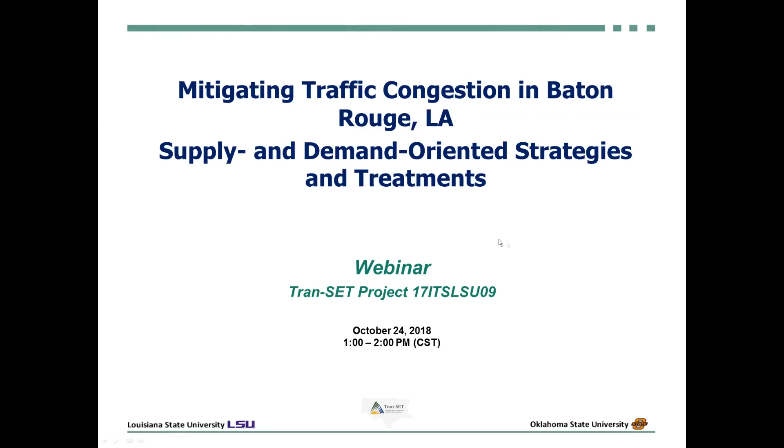The project is entitled Mitigating Traffic Congestion in Baton Rouge: Supply and Demand-Oriented Strategies and Treatments. We'll go over some general background. The purpose of the study is to identify treatments and strategies with emphasis on the bridge, the I-10 Mississippi River Bridge.

The I-10 corridor is one of the heavily traveled coast-to-coast interstates. It carries a large number of trucks and has been identified as a freight corridor. The portion of I-10 that goes through Baton Rouge was constructed in the 1960s. It's a 4-lane freeway, meaning 2 lanes per direction, and the Mississippi River Bridge on I-10 is also 2 lanes per direction.

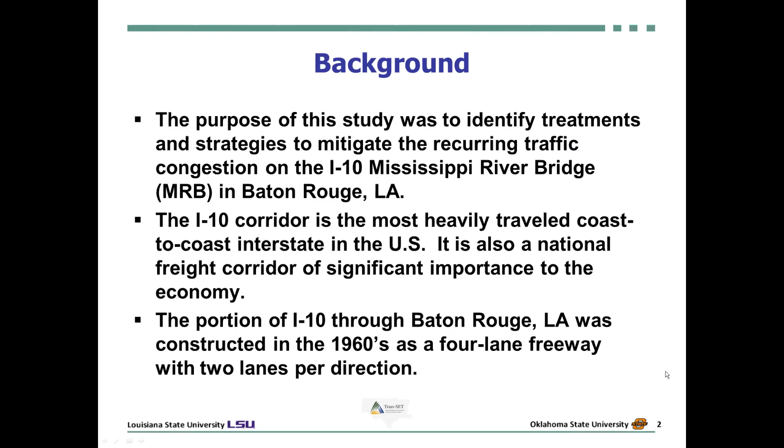There are traffic lights along that corridor. They are not synchronized and wait times are very long. Most people traveling from east to west or west to east relative to the river prefer to use the I-10 bridge because it provides a direct connection to most significant points of interest. Also, the older bridge and route leading to it are not in good shape, which is why the older bridge is underutilized.

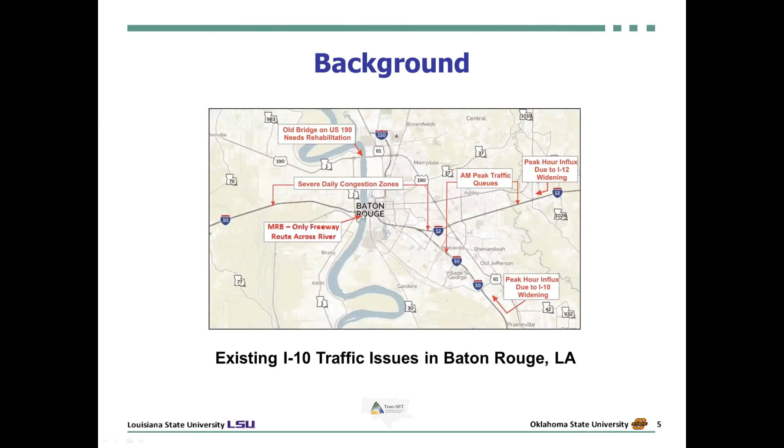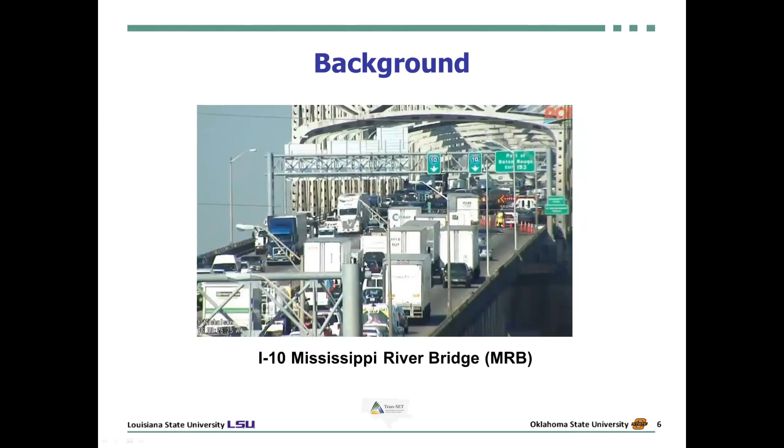So these are the problems that we have now. From this point on I-10, more or less to the junction between I-10 and I-12, we have recurring congestion during the morning and afternoon peaks. The project was to address that congestion with emphasis on the bridge, to see what can be done. This is a picture of the bridge—as you can tell, a large number of trucks traveling in stop-and-go conditions.

Relieving congestion on the I-10 Mississippi River Bridge can be done easily if we have money to construct a new bridge. But a new bridge will cost about $1 billion, and that's in dollars from maybe 10 years ago.

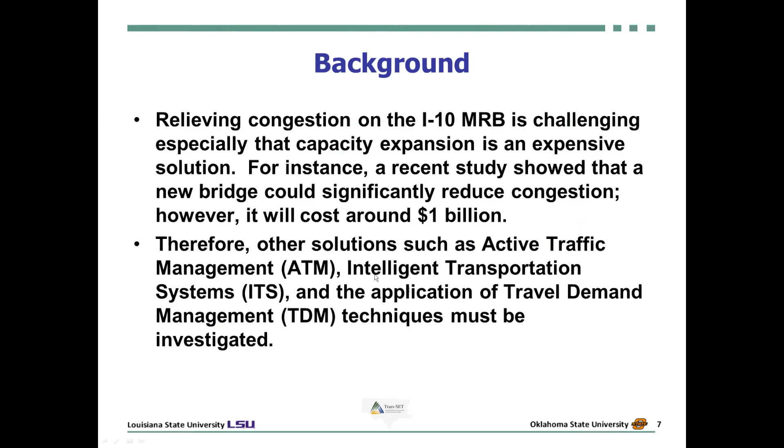So that option really is not feasible economically. We were asked to look at other solutions that have not been explored in depth, especially active traffic management, intelligent transportation systems, and travel demand management techniques. That's the focus of our work, these applications.

Just to give you an idea about previous work done to address congestion on I-10 and the Mississippi River Bridge, there were studies and projects proposed for the I-10 corridor itself, and projects proposed off the corridor, the roadway network beyond the corridor.

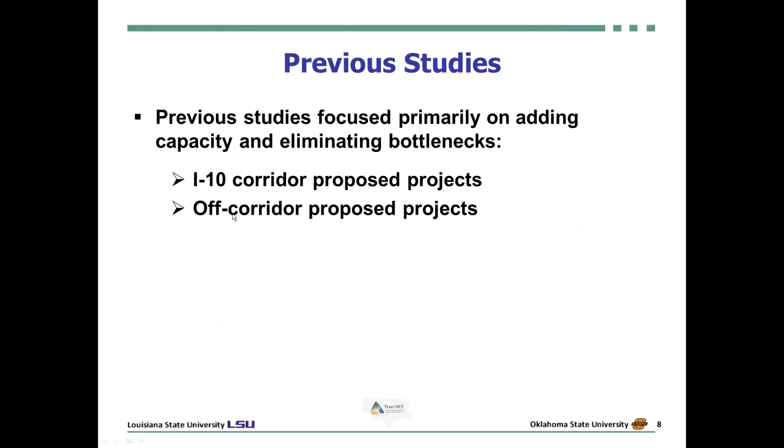Examples of I-10 corridor projects include the I-10 Baton Rouge Major Investment Study, sponsored by Louisiana DOTD in 2000. There is also the National I-10 Freight Corridor Study, a national study in which FHWA and LDOTD participated.

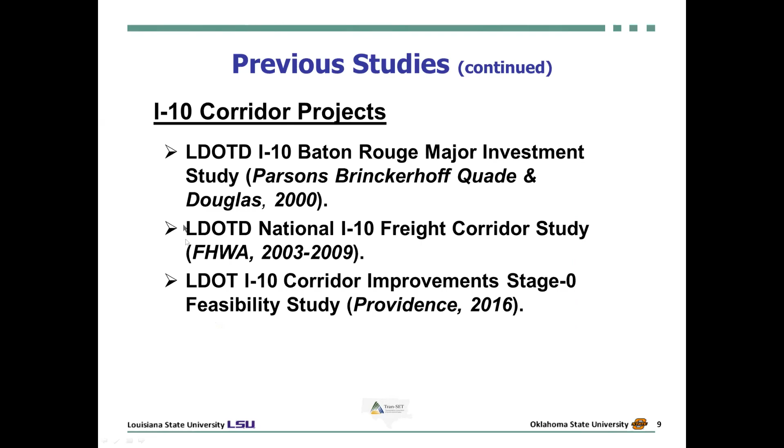There is also the LDOT I-10 Corridor Improvements Stage 0 Feasibility Study, which is more recent. So these are the major studies that address the corridor itself. These are examples of the cover pages of these studies, available on the web.

This is something recent I have seen about capacity improvements to the I-10 corridor, east of the bridge. There are 3 stages proposed, primarily widening the I-10 from 4 lanes to 6 lanes, adding 1 lane per direction, and eliminating some on-ramps and off-ramps, rebuilding them as new ramps to eliminate weaving and excessive lane changing. These improvements are along a 3.5-mile segment of the I-10 corridor, with an expected cost of $350 million.

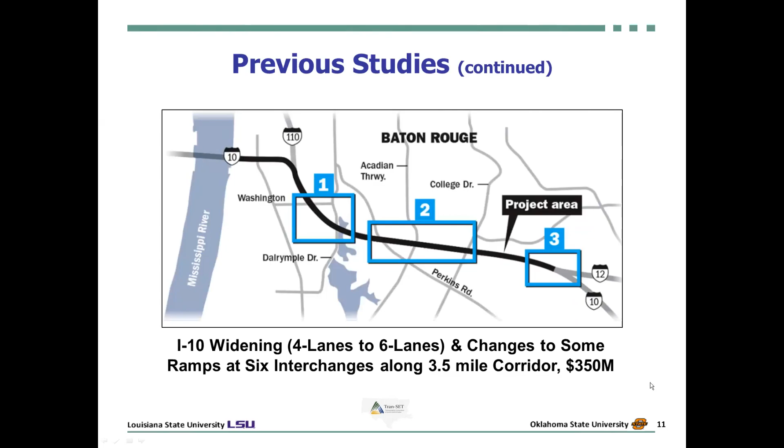This here is stage 1. It addresses the exits at Washington Street and Dalrymple Drive. Some exits and on-ramps will be removed and new ones constructed, in addition to the widening of I-10.

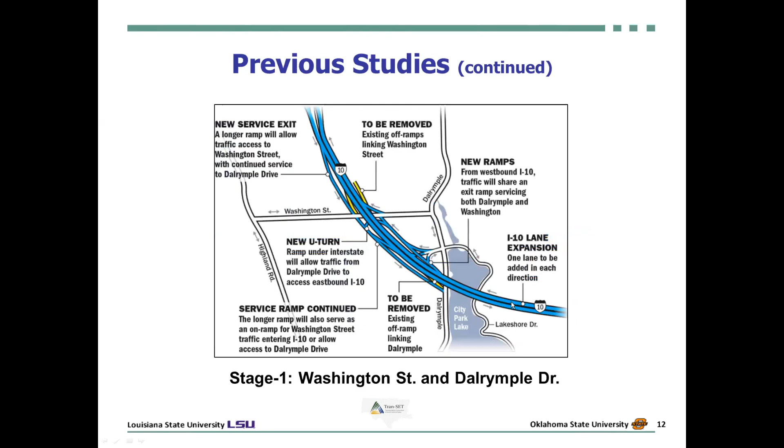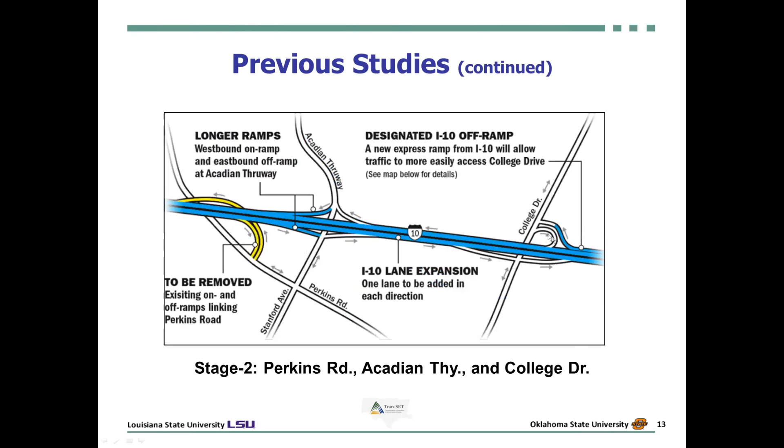This is the second stage, where exits will be removed and new ones modified. And this is the third phase of that proposed capacity improvement.

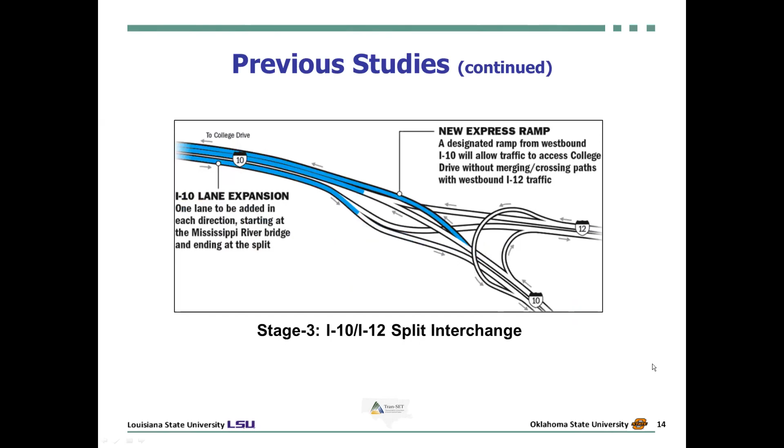Now, off-corridor projects, there were a number of them. One is adding or constructing a new bridge south of the I-10 bridge, but as I said, that proved to be expensive and not feasible.

There is the Baton Rouge Urban Renewal and Mobility Plan, known as the BUMP study, proposed by AECOM. It's a very interesting study, and we'll talk about it in some detail shortly. There is also the West Side Expressway, the Louisiana 1 to Louisiana 415 connector, and the Baton Rouge Loop Northern Bypass. A number of proposals, but unfortunately not too much has been done.

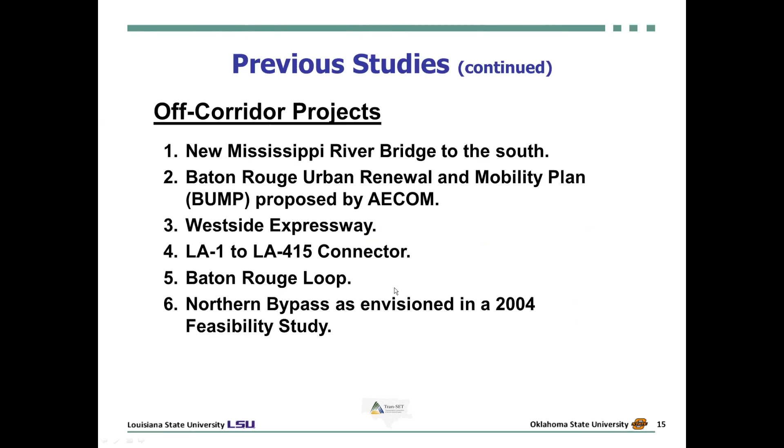The second option, the BUMP study or proposal - the goal is to use the old bridge and the underutilized network that leads from the old bridge in order to lessen the demand on I-10 and the I-10 bridge.

This here is the BUMP study. As you can tell, they use the term SIU for Segment of Independent Utility, meaning you can have this part separate or that part separate. This here is linking US 61 to I-10, with improvements to the 61 and 190 corridor, and rehabilitation improvement to the old bridge itself.

The BUMP project we envisioned to be a toll road, but it really doesn't have to be. If funds are available and finances can be secured, then it doesn't have to be a toll facility.

Also, the existing businesses and land uses nearby would be served by local roads parallel to the corridor, like service streets or parallel service roads, to provide the necessary access to this limited access facility, which would be kind of a toll facility.

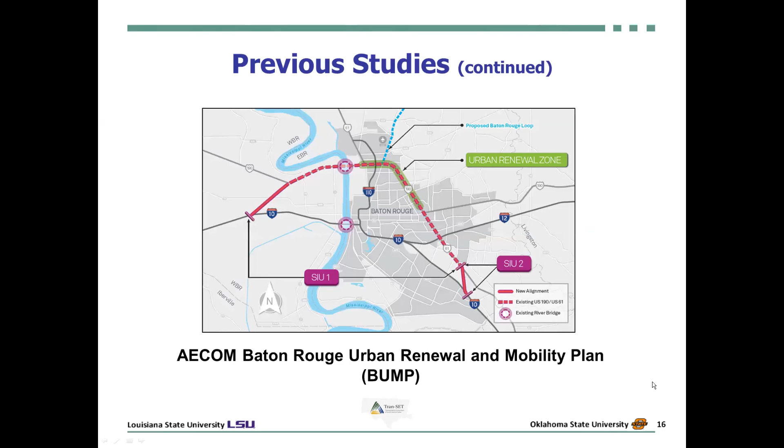The data available to us when we started looking at the problem was not too much, really - that was a major problem coming up with data. Louisiana DOTD was one of the major sources. We had traffic volumes along with a simulation model, the VISSIM model, as we'll discuss.

It was hourly volumes, 3 hours in the AM peak and 4 hours in the PM peak, and these were used as demand inputs in VISSIM.

Streetlytics, which is part of Citilabs, provided traffic volume data: 3 hour AM, 3 hour PM aggregated volumes. These were used in calibrating and validating the simulation model.

Then we have the National Performance Management Research Data Set, a national data set maintained by the FHWA. We used that to come up with travel times and speeds, which again were needed for calibration and

validation of the same model during the AM and PM peaks. Data was also obtained from the City of Baton Rouge and the Louisiana DOT regarding traffic signal schedules and timing, which we used again in the calibration and validation of VISSIM.

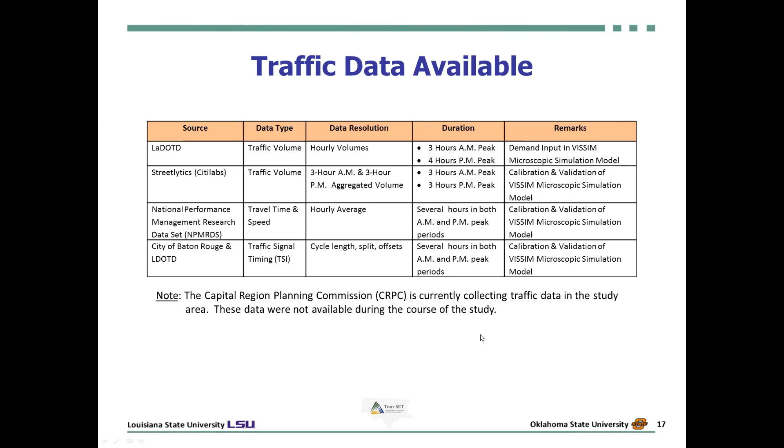Later on, as the project was about to come to an end, we heard that the Capital Region Planning Commission was collecting data that we could have used if it was available to us. But unfortunately that effort is still going on, and we did not have the opportunity to use their data.

As I said, there is a microscopic simulation model, the VISSIM platform. It was available from Louisiana DOTD, and we acquired it. There were some hourly volumes encoded into that model. It was a partial model, not a complete network, just for I-10 and the segments east and west of the bridge. The segments that lead to the old bridge were not part of the model.

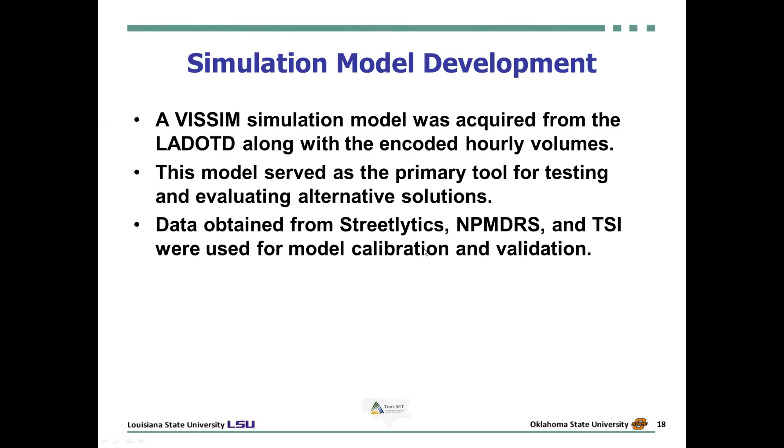The model served as our primary tool for testing and evaluating alternative solutions or recommendations. The data obtained from the other three sources, Streetlytics, the National Performance Management Research Data Set, and the traffic signal data, were used again in the calibration and validation of the model.

The treatments and strategies that we explored were identified by the investigators, the PIs, with some discussions with the stakeholders at Louisiana DOT and the Louisiana Transportation Research Center.

We have the first category of treatments: supply-oriented, meaning adding capacity primarily or eliminating bottlenecks. Then demand-oriented, which has to do with either metering the demand or finding alternate routes to divert some of the demand to an underutilized corridor.

For the supply-oriented measures, one of the alternatives we explored was again to address the junctions, the exit ramps at Washington Street and Dalrymple Drive. The exits there to I-10 were very close, with lots of lane changing and queuing developing and coming back up to I-10 for long distances. So that was one of the proposals that we explored.

The other proposal had to do with improving the corridor on US 190 and US 61 and rehabilitating the old bridge so it can carry heavy trucks. This was also examined in our simulations. For these two, the modes affected are passenger cars, trucks, and transit.

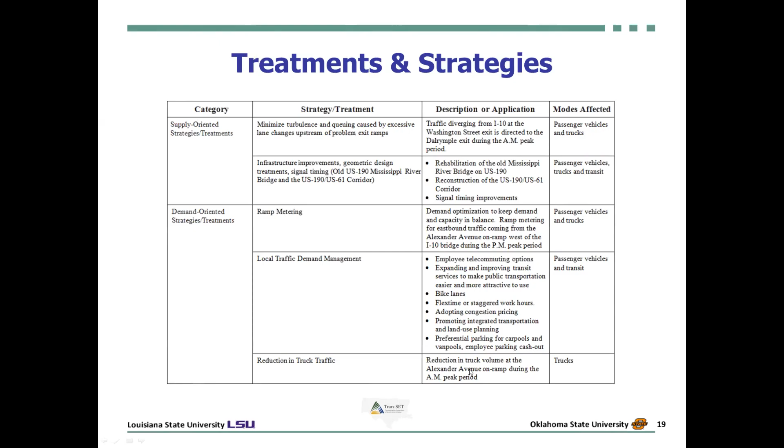The measures of effectiveness and metrics that we used or computed from the simulation model to evaluate the alternatives were: average delay in seconds per vehicle, throughput (vehicle volume), total delay in vehicle hours, vehicle miles of travel, the annual cost of delay in dollars per year, and the economic savings, annual economic savings per year.

Which involves comparing the cost for a given alternative with the cost associated with doing nothing, and that gives us savings. In computing the economic savings, which we call user cost, we took the delay in vehicle hours and multiplied it by half of the average hourly wage in Baton Rouge. The average wage was $21.38.

It's customary when you compute delay, the savings in travel time, to use half of that wage. So half of this times the vehicle hours gives us the user cost. The user cost associated with doing nothing and the user cost associated with any of the proposed alternatives - these two gave us the annual economic savings.

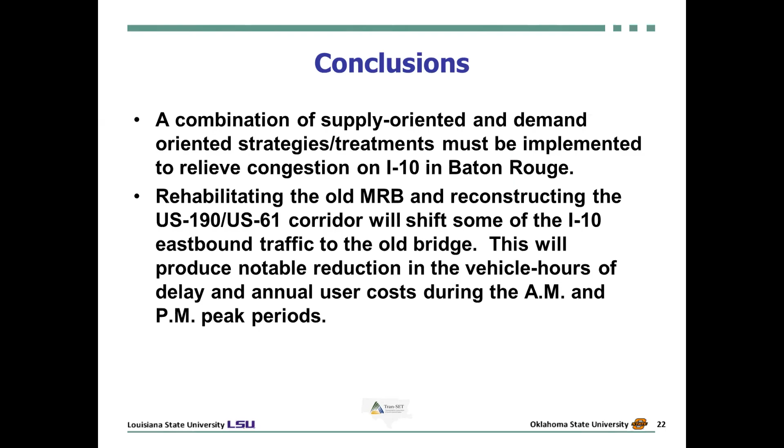Implementation of local traffic demand management, telecommuting, transit, etc., can produce immediate reduction in travel delays or traffic delays on I-10. But as I said, it just requires public acceptance and employer participation.

Ramp metering at the Alexander Avenue ramp - I think there is ramp metering there now. I did not know about it when I wrote the report, but I understood that later. So ramp metering here can again result in notable reduction in delays during the PM peak.

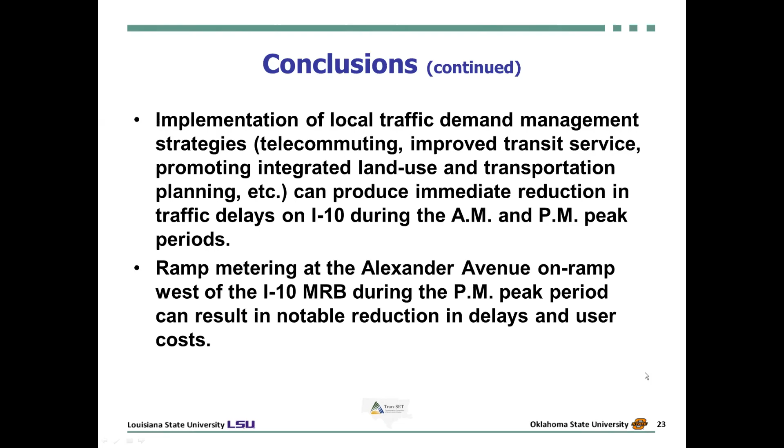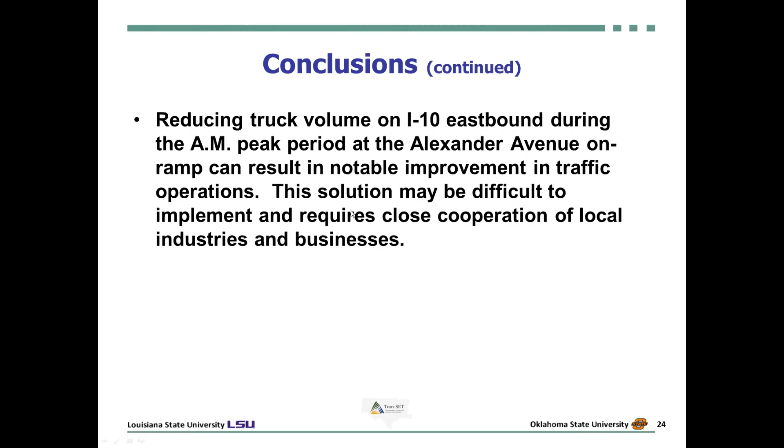Reducing the truck traffic during the AM peak, going from west to east at the Alexander Avenue on-ramp, can produce notable results, but it's just industry acceptance and scheduling the trucks that we have to buy into.

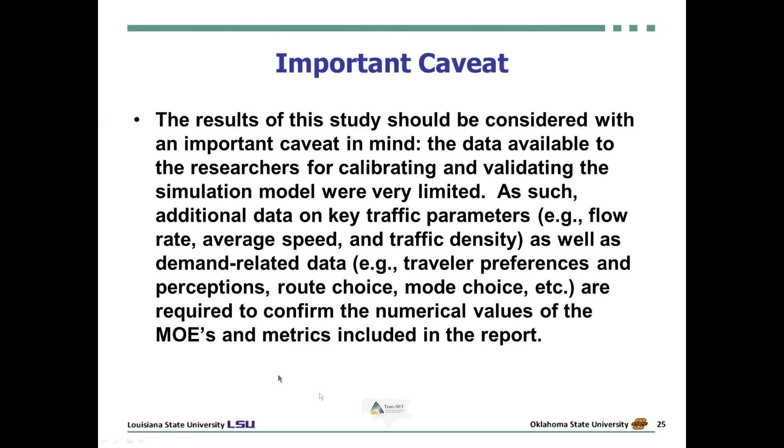There's an important caveat we need to be aware of: the data available to researchers for calibrating and validating the model were very limited. Therefore, additional data need to be collected, and some is being collected now. We need more information on traffic flow rates, average speeds, traffic density, demand or travel demand data, traveler preferences, and perceptions in terms of route choice, mode choice, etc. We need that kind of data to validate the metrics and MOEs included in the report.

I think that's the presentation, and I would like to entertain any questions. There is a question in the Q&A pod, which I'll read.

It's from Hong Wu, a modeler at the Capital Region Planning Commission here in Baton Rouge. He asked what year's NPMRDS data was used in the analysis. The data used here, I think, was 2016, but let me verify that in the report. The reason we didn't use the latest National Performance Management Research Data Set currently available was...

...that we had to be consistent. Some data were obtained from Louisiana DOT, some from Streetlytics, so we had to have a baseline and be consistent with that year, not use data from different time periods. But to answer your question, I should be able to get that. Just to chip in, I think it's 2015 data we used. I'm sorry, I couldn't hear the question well. No, it's me confirming with you that it's 2015 data.

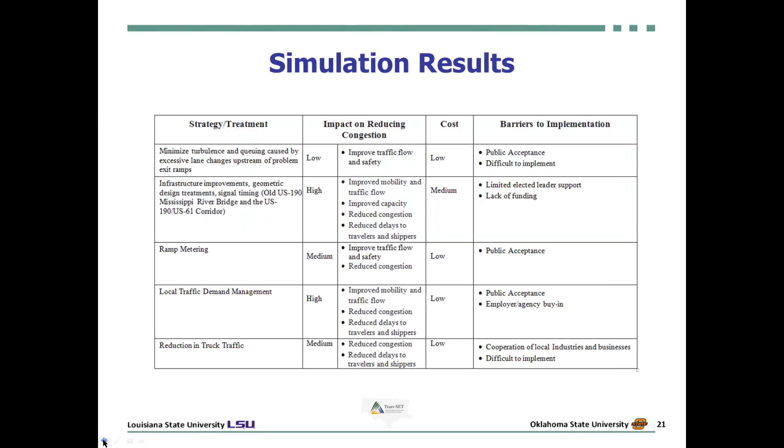I don't see any more questions. Speakers and Dr. Kojo, if you have any final remarks, please go ahead.

I just would like to thank the attendees for joining the webinar. We would love to have had better data, because the effort was really very demanding in terms of time for this project. It's disappointing when you struggle with data, when you don't have what you need to do statistical analysis and reliable metrics, but we had to work with what we have.